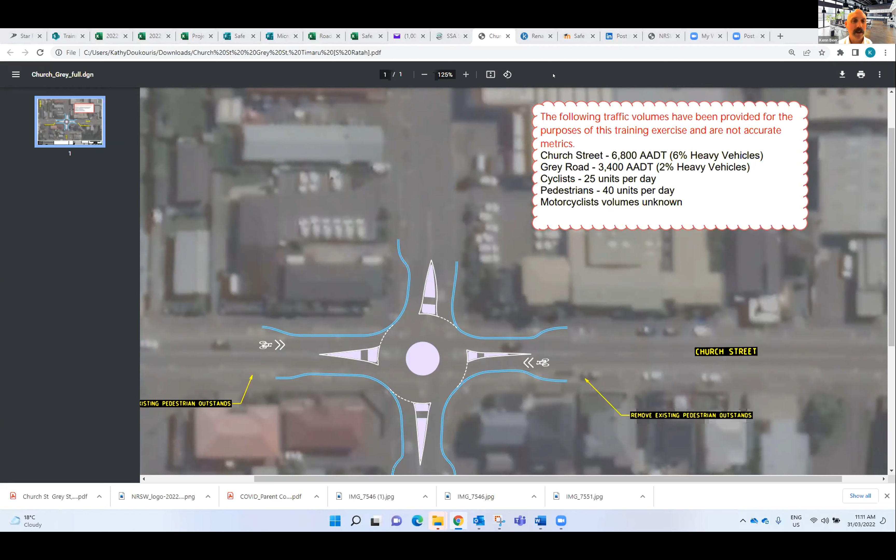It's very conceptual, as you can see. That's the concept. I suppose when they get to detailed design, they're going to have to nut out exact widths of those bits and pieces. But yeah, I think that all appears to make sense to me. But maybe whoever asked that question, if that explanation I've given hasn't helped you...

Okay, I think that one's come in. Think you've had enough. Yeah, good. Okay, Kathy, any more?

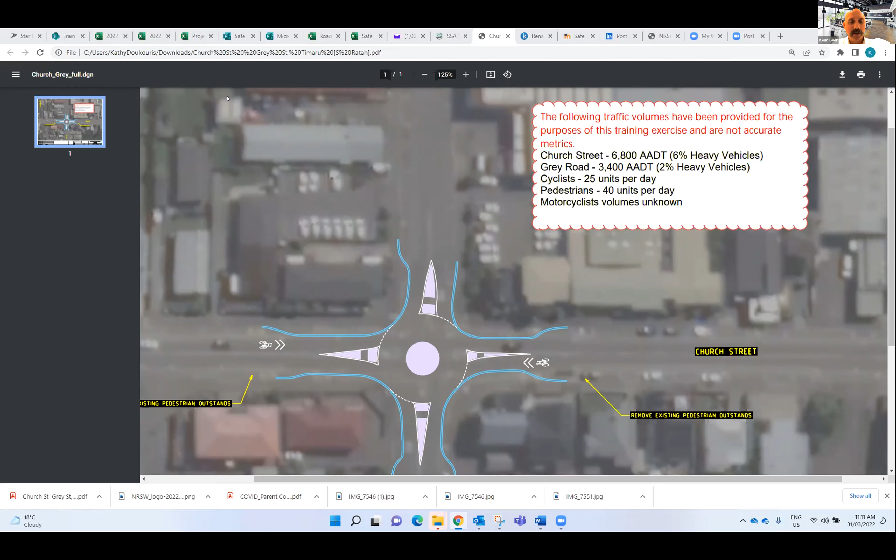Why, as part of an SSA, are suggestions made for improving safety - safe system alignment of a project option? It feels like that aspect is getting into the RSA space.

Yeah, no, that's a fair point. Both road safety audits and safe system assessments make those recommendations to improve things. It's probably one of the areas of significant overlap, but in a practical rollout sense, the freedom to make significant change recommendations in a safe system assessment is more. It's probably just a legacy culture from road safety auditing, where the auditors tend to make minor suggestions - again, using the large signalized intersection example, the design comes in, and the auditor is often reluctant to make that big picture call of raising the whole intersection or these sort of things. They can - there's nothing stopping them doing that - but just the general approach of industry has been that the auditors are not making that large scope change commentary, more just tweaking with the specifics.

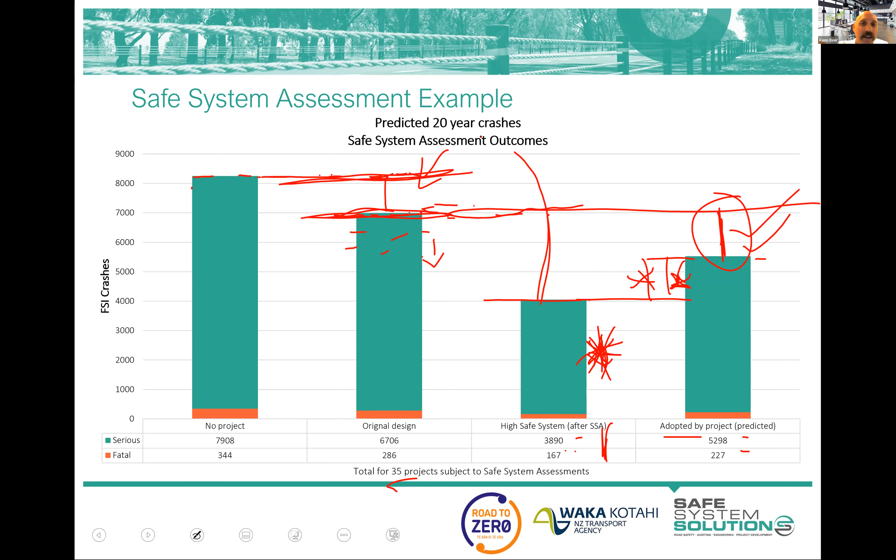I think what we'll see is this difference should start coming down closer to this over time, and the reason for that is that designers will get better. Safe system assessments do this wonderful job where that assessment goes back to the designer, and the designer gets it, reads it, and goes, oh okay, alright, well I can do that - that's what the safe system aligned thing is. Then the next design they produce, they think more about those features, and the next design, and then that gets safe system assessed.

And we saw that play out with road safety audits - it did an amazing job educating designers and project engineers to good road safety, or pretty good road safety practices and thinking about that. So we get this education benefit in industry from going through that process of safe system assessing.

So hopefully we'll see that coming down, we'll see this coming down, and we'll see this coming down as well. So we're gonna see some pretty exciting stuff. This will - well, they had some prediction and no project benefits associated with the vehicle fleet getting better over time by itself, and those sort of things. But we might see some big ticket policy interventions that could bring that down a little bit as well.

So that's that graph, and I've drawn lots of things on it, but I'd be interested if people have comments on that or questions about that, or we could answer some other questions if they're in there.

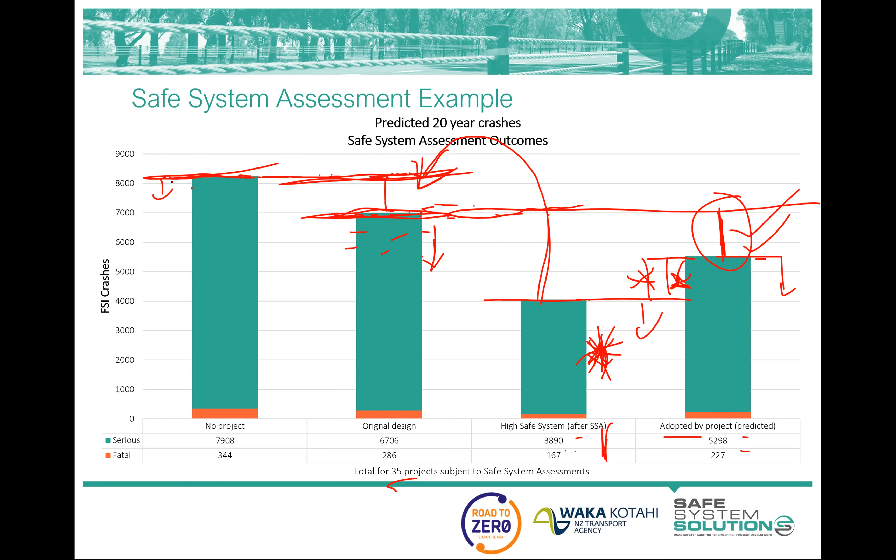There's just been some questions, and just to reiterate, with your safe system assessment, you go out and have a look at the site, and you do the safe system assessment write-up and scoring on the existing conditions. And then the plan that we've given you with the concept design on there is your design option 1. Correct. Good, thank you.

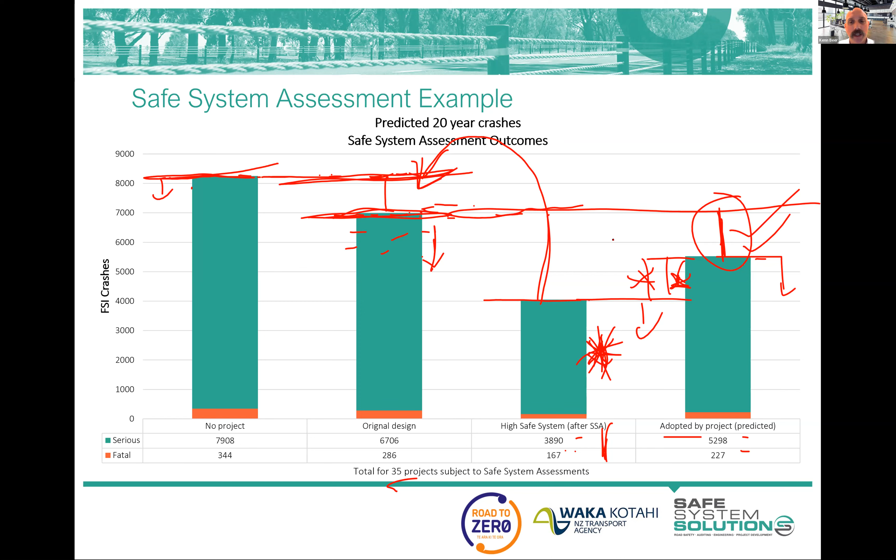Okay, I'm going to keep going. Okay, then I think that's probably good. It just shows the good benefits we can get from just going through this process of safe system assessments, which I'm going to be encouraging you all to obviously get out there and start doing.

So just in some written form, some of the benefits of safe system assessment: it's a great way of determining how well a project aligns with safe system principles, and that's been something the industry's been craving for a long time. I mean, people say, oh well, that's not safe system, or that is safe system, or that's not good safe system practice. Well, this is sort of a formalized quantification of that.

It's a great method for comparing project design options from a safe system perspective. With road safety audits, it's pretty clear in the Austroads guidance, and generally in New Zealand guidance as well, that audits are not really a tool for comparing project options - they are there to assess any risks that the option presents. And so we haven't really been able to have road safety injected into multi-criteria assessments in a systematic way.

People have developed ad hoc ways to do that, but it's never been this meaty part of that multi-criteria assessment in the way it should have been. Or sometimes, if it's a road safety project, it is, but if it's a public transport project or a congestion easing project, it can often be, are we meeting all the standards? And then that's given this sort of safety tick, and off you go.

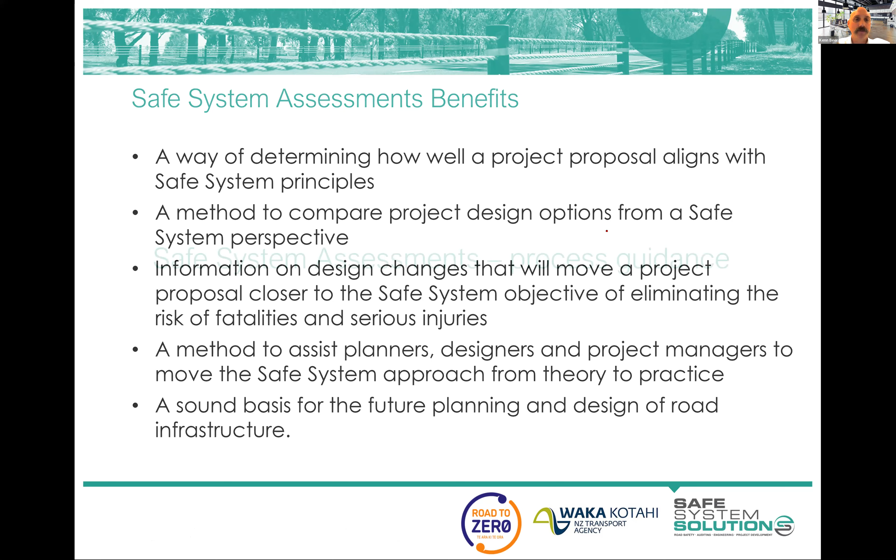So let's have a look at some process guidance. Now, this is general guidance. Waka Kotahi is going to shortly put out some guidance around a new road safety audit guidelines and policy, and we're seeing drafts on that.

It aligns very well with what I'm about to tell you around how safe system assessments can integrate and fit into this. But certainly safe system assessments will be required at that level, and down at a local government level, it'll be up to local governments themselves as to how they choose to integrate this into their projects and programs.

But we know that safe system assessments are best usually utilised at concept, draft, early stages of conceptualising an infrastructure project. And once you're into the details of it, this is where road safety audits seem to play out as a better tool to use.

So some of the reasons for that: the nature of the safe system assessment is to put forward decent changes to these projects, suggestions on big alterations, additions of new features, changed forms of intersection and the like. And if you're getting that at detailed or functional stage, there's huge reluctance to alter.

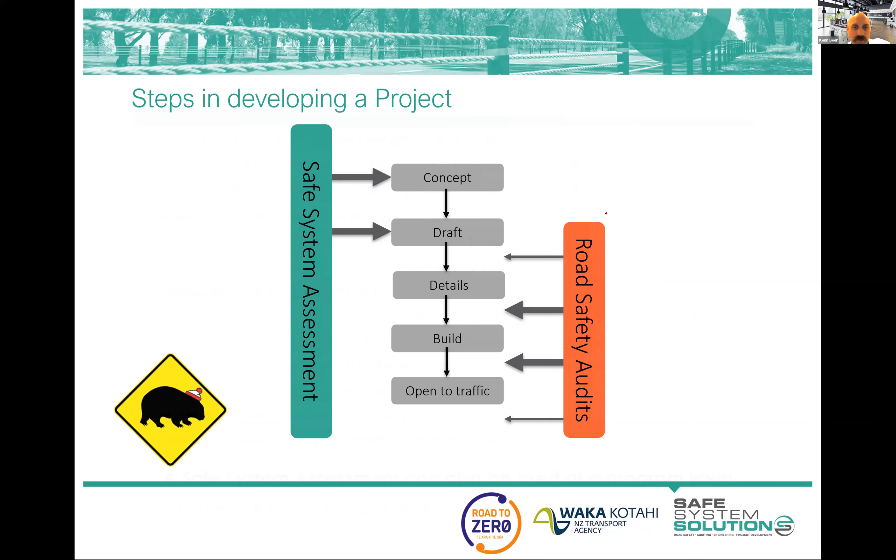And what is the difference, I suppose, is a fair question to ask. The 2022 version of the Austroads Guide to Road Safety Part 6, Road Safety Audit, has improved things in the audit sense, and we're continuing to work on that.

So we see likelihood covered off really well in both. Severity, sometimes - better under 2022, and it should be done well. But exposure as its own entity is not really there in a road safety audit. Exposure as anything would in an audit integrate back into likelihood.

Recommendations - that comment was made in both of them, and should improve road safety outcomes. I'd say you'd find that a safe system assessment will be freer to suggest bigger picture and more innovative things usually, but auditors can do that as well. They're probably pretty good at considering all road users - the safe system assessment forces that with the columns, and auditors generally are pretty good at considering all road users too.

Fatal and serious injuries only for a safe system assessment, and audits tend to capture those other injuries quite well, which can be an advantage for you in holistically thinking about the project. But the safe system assessment just says, let's work on those fatal and serious injury crashes.

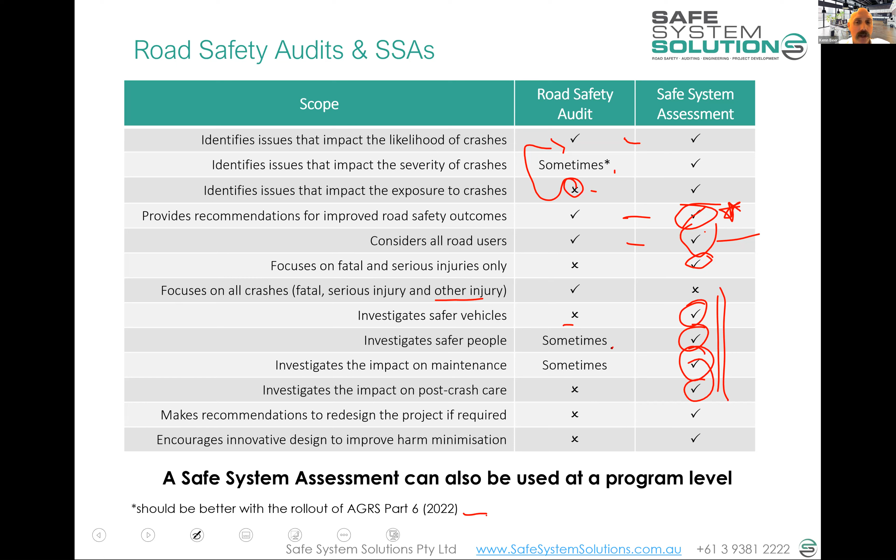Then you have these other elements of the safe system - the vehicles, the people, the ideas of maintenance and post-crash care - all through those qualitative questions. Road safety audits don't tend to get into that in detail at all. They often, in good audits, think about which people will be using it and what's their level of attention and those sorts of things. So that can be good in a well done audit, and how does it get maintained and those sorts of things, but these others aren't really there.

So to redesign the project - and redesign there means really fundamental changes - safe system assessments do that. Audits really aren't there to redesign the project. It's to tweak and make sure it's redone or implemented as safely as possible.

Innovative design encourages innovative design. As I mentioned in an earlier session, a road safety audit by its nature is only going to report on the things proposed to be built that will increase risk. It's not going to report on what's being proposed that will do a really good job of reducing risk, because that's not the auditor's job—that's whoever's developing the business case and project design. The audit isn't going to present that.

Also, audits and auditors often don't report on what's not being built. They report on what's being built and what risks it could produce, but far less on what is not being built, if that makes sense. That's really important too—not just what's being built and causing issues, but noting what's not being built, and how we can get more out of this project if we do these extra things.

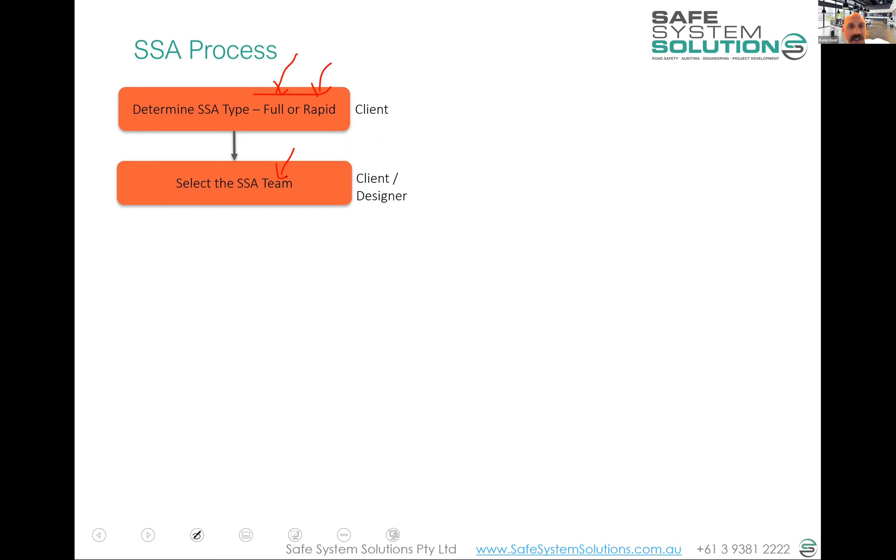Now, we do talk about teams, and we do like to do safe system assessments in teams, a bit like road safety audits in teams. It's alluded to, but it's not absolutely hard and fast that it must be a team—it's sort of said it works well in teams.

Then there's some sort of exchange of information—you can call it a commencement meeting—and this is where everybody gets in the room or on Teams or the like, and explains the project, making sure everybody's clear. It's a good opportunity for you as a safe system assessor to ensure your client understands what the process is, what will be produced, and what they are to do with any reports that come out of it.

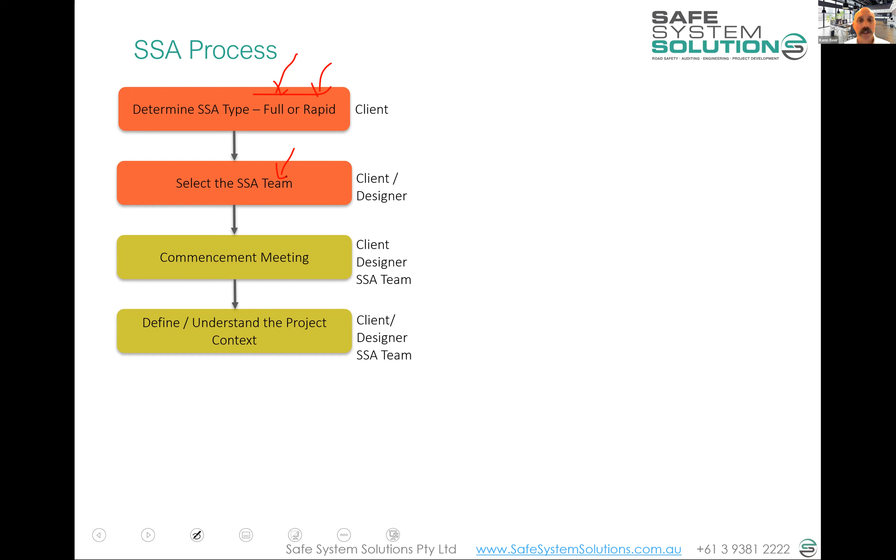It's also a good time to really understand the context of the project that's proposed. This is where they can talk about all of their constraints, the different things that have been committed, land use, and volumes of vehicles—really gather that information. I'll often do all of this as one sort of workshop, making sure everybody's on the same page, and then just get a good description of the project.

Ask lots of questions. Why are you doing that? What's the growth of the area like? Where are the schools in the area? What have you got—traffic volumes? Have you got pedestrian volumes? Have you got cyclist volumes? Can you predict pedestrian volumes? All of that sort of stuff—gather all that intel.

Then it goes off, and the safe system assessment team start to work by themselves, and they inspect the site. They complete the matrices, which you are doing at the moment, and you'll start to get into that.

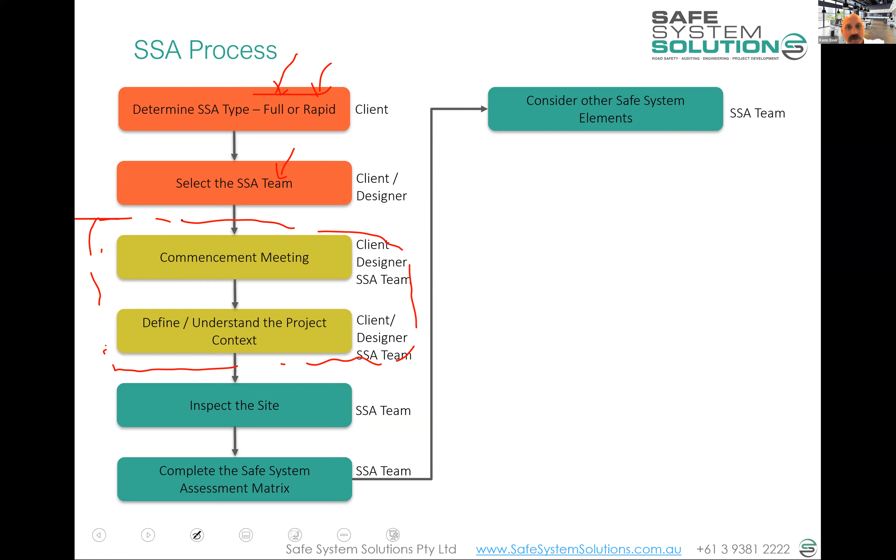They fill those out with some details, some scores. They do the existing conditions, they do all of the designs, and they consider the other elements of the safe system and those qualitative questions.

They provide recommendations or ideas on treatments to improve safe system alignment.

They write all of this up into the report using standard templates, as in standard headings and the like, not necessarily the standard front cover and things. Put your own front covers and the like, but ensuring we're covering off the same information, and you're getting practice at that as well. And then that's handed over.

And it's then over to the project team to respond to the suggested changes. So certainly they might be using the scoring to inform different choices that they'll be making. But they're also expected to make comments as to why they will or won't be able to do different things that this safe system assessment team is suggesting.

And then they amend the designs based on that. Now, there's really no requirement for that response to go to the safe system assessment team, but it's this important process that we never want them to forget that this is advice on improvement. This is not just the scoring, but advice to improve as well. So you need to start considering these and integrating agreed changes in here.

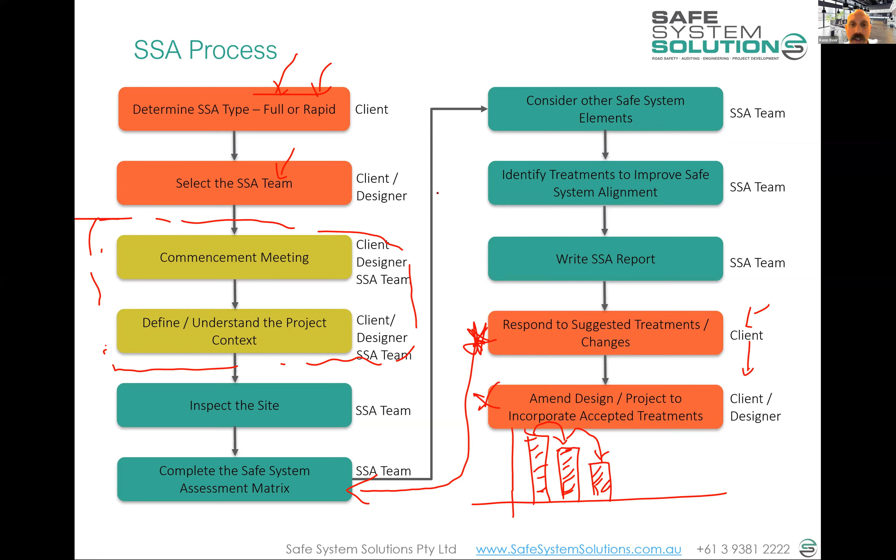So just flagging what some other jurisdictions are doing, so you're aware of what's happening across Australia and a bit about New Zealand. I think the Victorian page, the Safe System Engineering page, is pretty good from a safe system assessment perspective, because it provides those templates you've been using, both the rapid and the full safe system assessment template. So I suggest you use those, and you'll see it says please rebrand them or whatever. Let's just be consistent with what we're producing. So that's some really good stuff there.

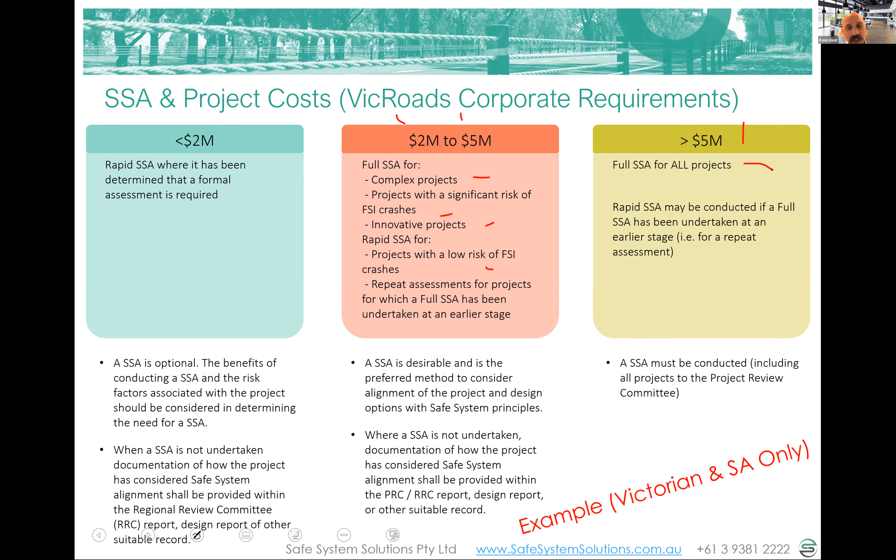We don't need safe system assessments for very minor little things often. Sometimes you should be able to identify and go, actually, there could be some benefit out of this. But the difference between that rapid and full safe system assessment is not a huge amount. Okay, there is a bit of difference—I'd say maybe a rapid is about 70% of the effort of a full. Anyway, let's just go through a full and I'll tell you what drops off for a rapid. But you've got your commencement meeting, which we talked about, and you get all your project background and context, and you have some sort of workshop, getting out there and looking at the site.

You look at the existing conditions and all the design options you're given, then produce matrices on all of those. You look at the other safe system elements - the people, the post-crash care, the vehicles - make recommendations on alterations to the designs, fill out the full safe system assessment report, and then it gets handed over to the client for consideration of them adopting changes, and they rescore if necessary and alter project scope.

So what drops off for a rapid assessment? Well, potentially not a commencement meeting, but often you still do that. You still got to get some sort of project background, so it might be more that they hand over some reports or the project context.

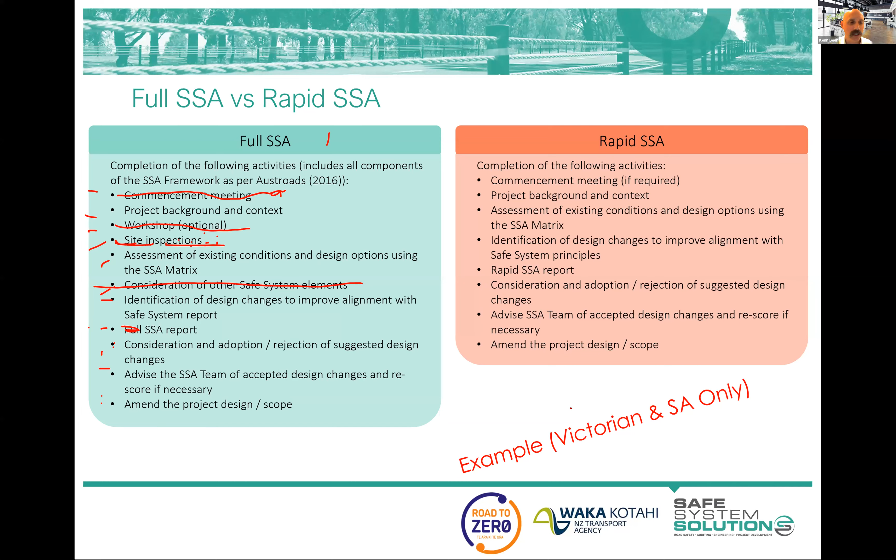Well, I've just got a few, I suppose, different road environments that I just want to briefly talk about their safe system alignment, because as we're talking about, we've got a specific road environment that everybody's doing safe system assessments on. But when we give you your certificate of successful completion, it doesn't say successful completion for local road intersections only. It just says safe system assessment, successful completion. So, in theory, you could then go and do a safe system assessment on a new motorway or a rural highway or a local road intersection or a strip shopping centre.

So we want to just run through at a very high level a few things on each of these different road environments I've popped in here. We'll do a couple of them interactive and a couple I'll just jump through quickly. It's really just to highlight a few things that we know align well with safe system principles in each of these road environments. We've covered a fair bit of it in the course already, but it just sort of wraps it up nicely.

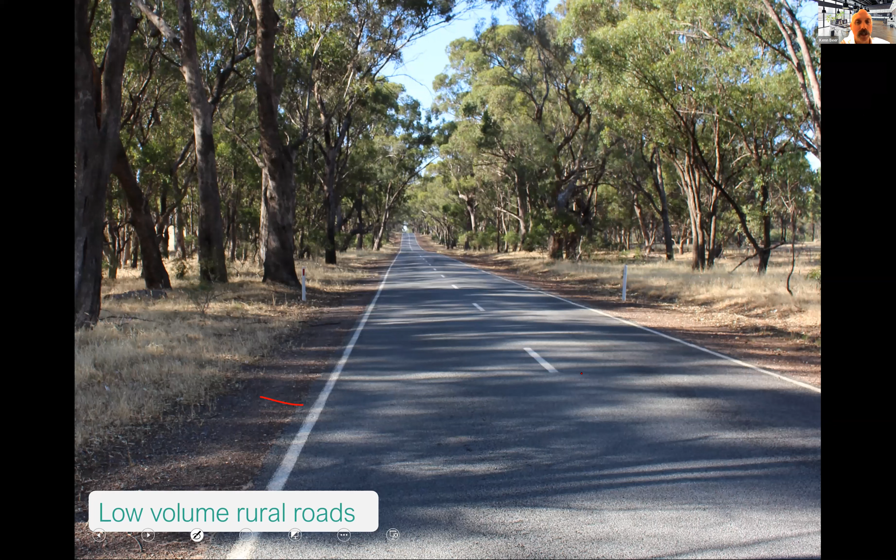So what we've got there is the requirement to start reducing speed on these roads to lessen the likelihood and severity of crashes, predominantly likelihood, because we're probably going from 100 kilometers an hour down to 80 or the like. Then really focusing on all the likelihood factors we can do, which would include things like sealed shoulders to reduce likelihood if you can, audio tactile edge line, center line, trying to get some separation. I often opt for a bit more separation and narrowing the lanes a bit, which reduces speed a little as well, delineation and the like.

But we are really going to have to start to re-evaluate travel speeds on these sorts of roads, and that's not going to be popular. I know New Zealand's got a lot of big plans, big strategies and big policy changes coming in this space, and certainly Australia is watching very closely and wanting some good leadership from New Zealand in this space, because it's going to be very, very challenging to get our community to understand why we need to do this.

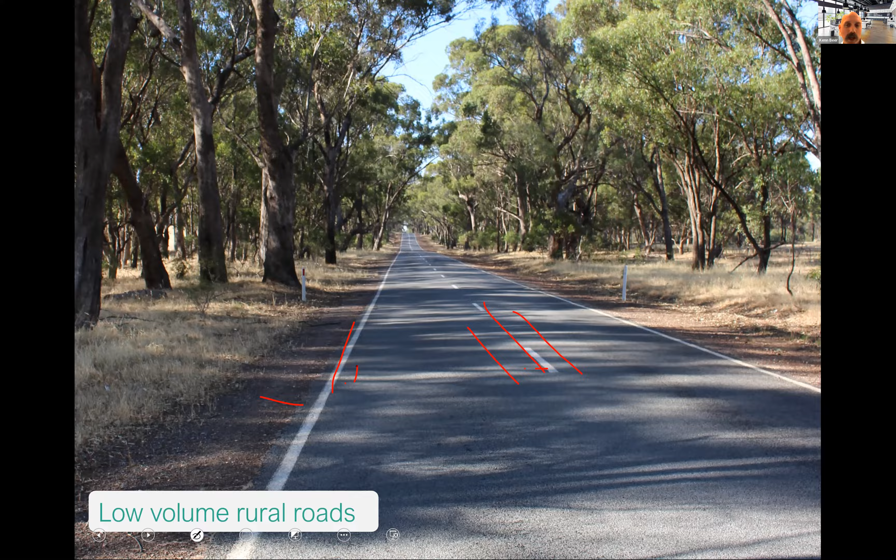The high volume rural roads, though, is where the investment in infrastructure is — where you want to be investing your infrastructure money on these roads, and you want to be creating the central barrier system and outer barriers so that you can keep the speeds high.

And the 1+1 type scenario, one lane in each direction with overtaking lanes — there's some pretty good examples across New Zealand now, we're seeing them roll out. Of course, you had one of the first ones in the Southern Hemisphere being the highway that rolls into Wellington, Centennial Highway I think it is. So that's just amazing road safety improvements after the installation of that central barrier system on a 1+1 style scenario, and it really has led the way there.

So deploying that on mass, but on the backbone of your network — keep the speeds high on those, and get the speeds lower on the ones you cannot invest in but are lower volume.

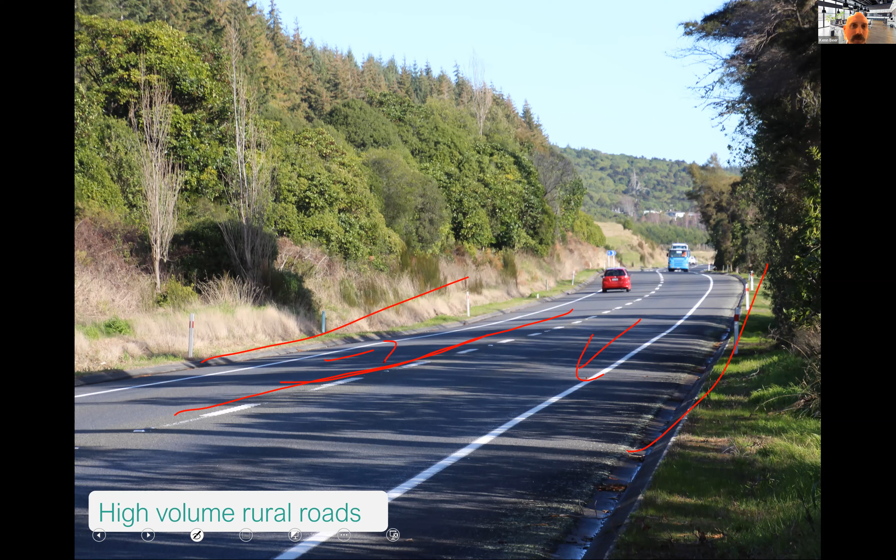Of course, when you do that central barrier system you have challenges — well, intersections, you're going to have to think about how you treat those, but also access points and breaks in access points if you've got a central barrier system. But if you're able to pop a roundabout in there and use that as a U-turn facility, that can be good. It does multiple purposes, as in slows vehicles at this dangerous point, provides a really safe U-turn facility if you've collected some people out of their access points along the way and they want to go the other way.

So theoretically, that's a wonderful way to do things. There's good ways to do corridor planning in this sense and pick your intersections, and think about treatments that operate and impact on both reducing risk at the intersection, but also as turnaround facilities, and how you can stage these works. You get some pretty nice potential benefits and outcomes from this.

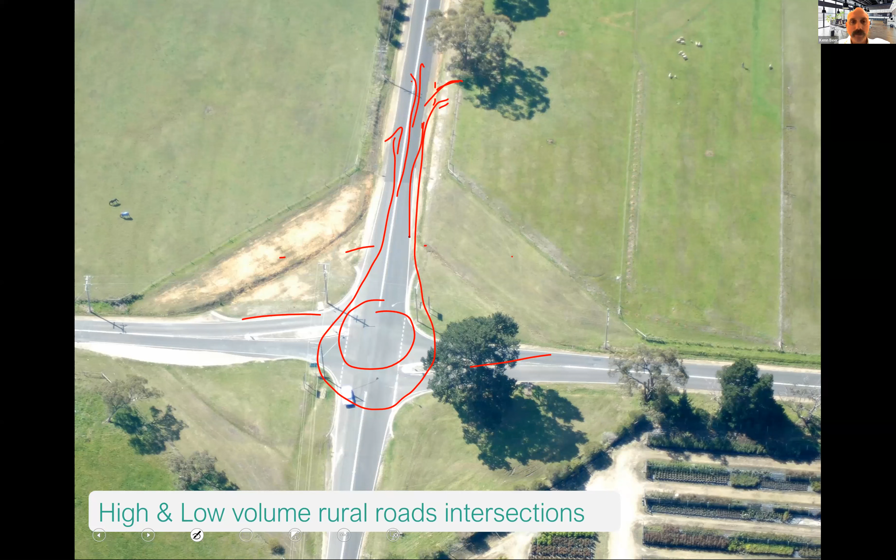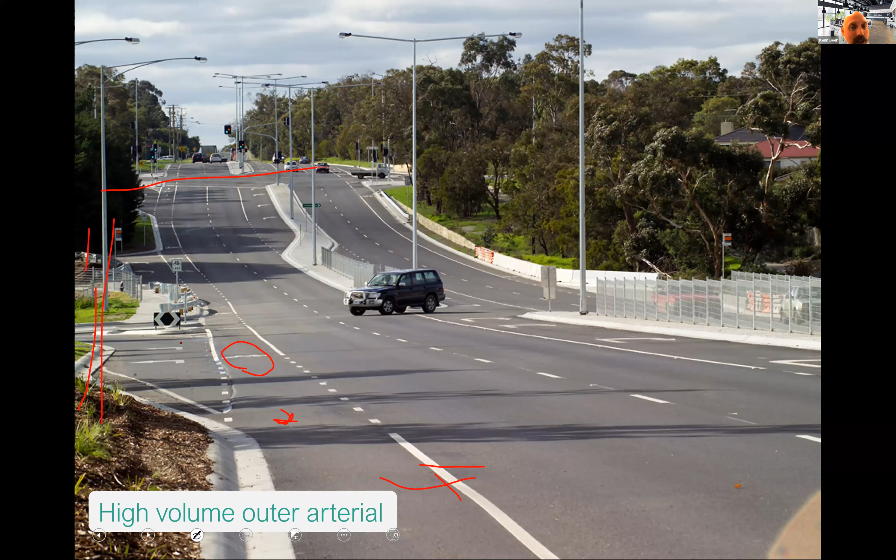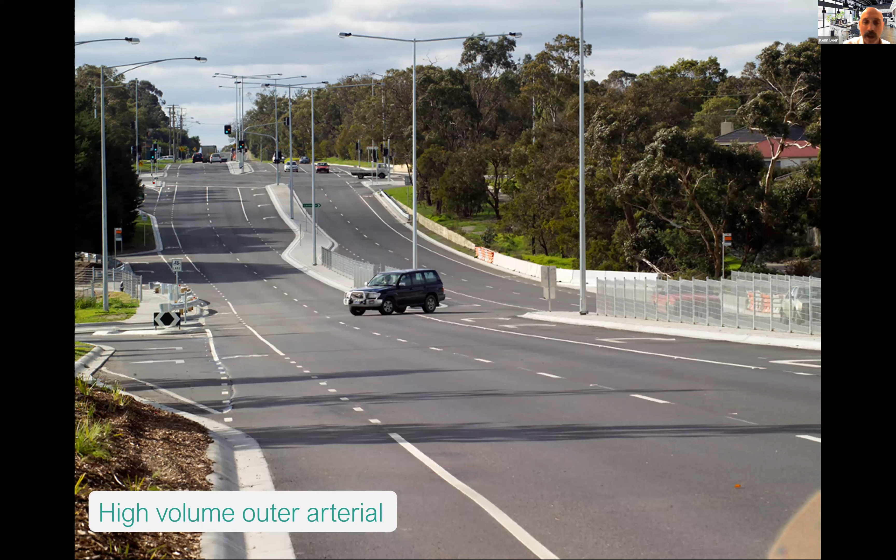And your motorways — really you're looking at trying to understand how they operate. So exposure is extremely high on these roads for passenger vehicle crashes.

The speeds tend to be high, but the likelihood of crash is actually quite low. They're really highly designed, but the exposure pushes that up into a different level. We do see very low amounts of cyclist trauma, almost none, because no cyclists are there, which shows the benefit of that exposure.

But we do see surprisingly high pedestrian trauma on motorways, and it's often due to people getting out of their cars or taxis in the wee hours of the morning and doing all sorts of crazy things, or going to the toilet, or throwing up, or whatever they're doing.

So what we end up having to do is manage incident management and those sorts of things, or when the freeway or motorway starts to break down in terms of flow. That's because we see high speed and an increased likelihood of crashes, so our severity and our likelihood are both up there.

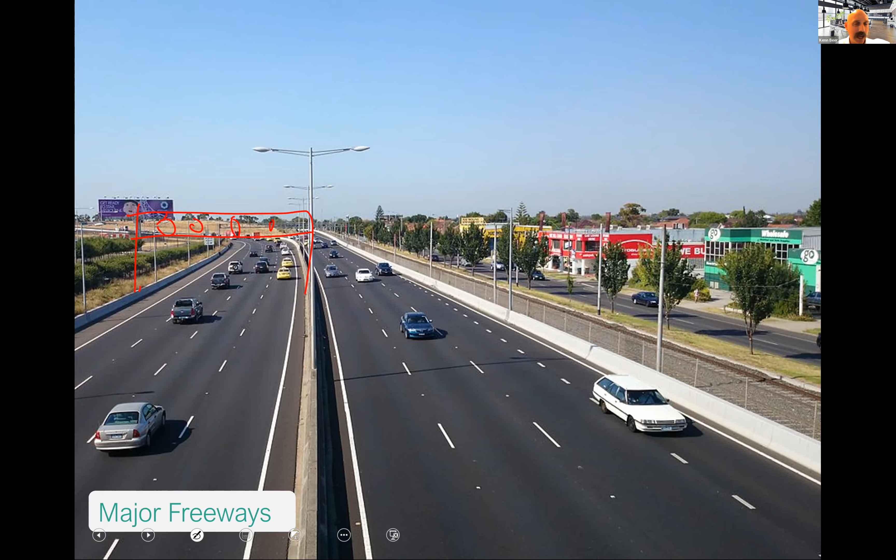And finally, our major rural highways, your State Highway 1 and the like, which, well, probably we could go back a few slides and look at those sort of 1+1 scenarios as well. But as you get your real big ones, we're going to see continuous barrier systems outside and through the middle of these, and then grade separating your intersections.

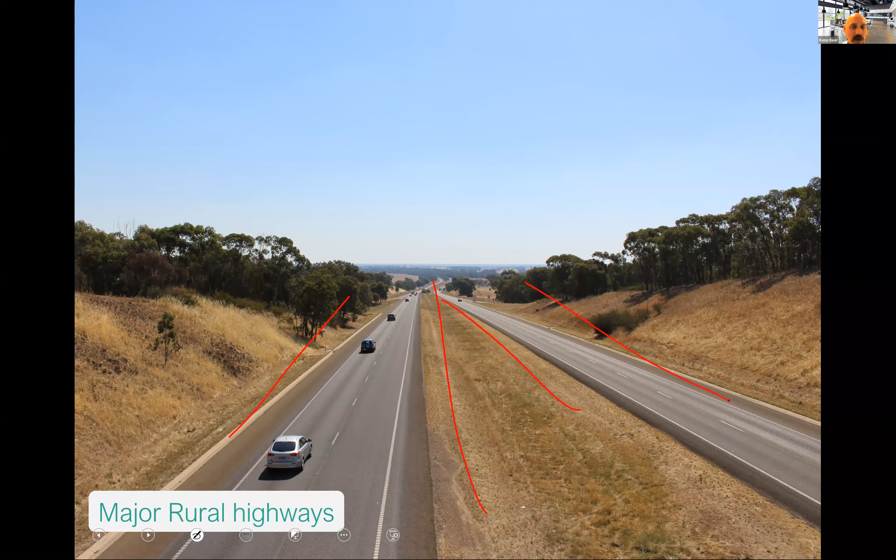Roundabouts are great, and if you can move those through on some of the higher volume ones, that's good. The lower volume ones, often we see a fairly well-aligned safe system option is, so if you've got an intersection like that, for example...

Instead of having the vehicle be able to cross or turn right out of here, you close off your median and provide a nice long acceleration lane and a nice amount of space for them to get into the right lane, a U-turn back, acceleration lane back, and again a nice amount of space for them to get over to the other side if they needed to go straight.

And what we see there is that the acceleration and the delta V in here is really good, because if crashes happen, the speeds, the angles, the change in velocity is good. They get some time to get over here. Same in that merge back, the delta V is good.

As long as you provide a decent length of acceleration lane, it's pretty good. Merge from right is not the best, but with decent speeds and angles and enough length, you get a decent outcome. That's how you can, without utilizing a grade separation or a major impact on through traffic speed, get pretty high alignment with safe system principles.